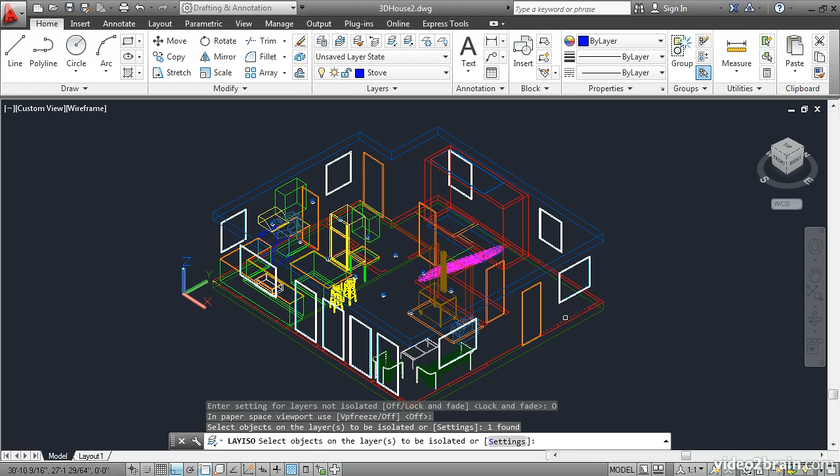In order to work on the walls of the house, let's go into the settings of this command and click Off. Press Enter and select one of the red lines representing the walls. Enter. Now we can work on this layer by itself. Click Top in the View cube to go to a plan view. Zoom in down here in this area.

Moving the cursor over the objects, I see that they are individual lines. This isn't going to work very well for a 3D model. Instead, let's create a new layer called 3D Walls. Make that layer current. Give it a different color, in this case, yellow.

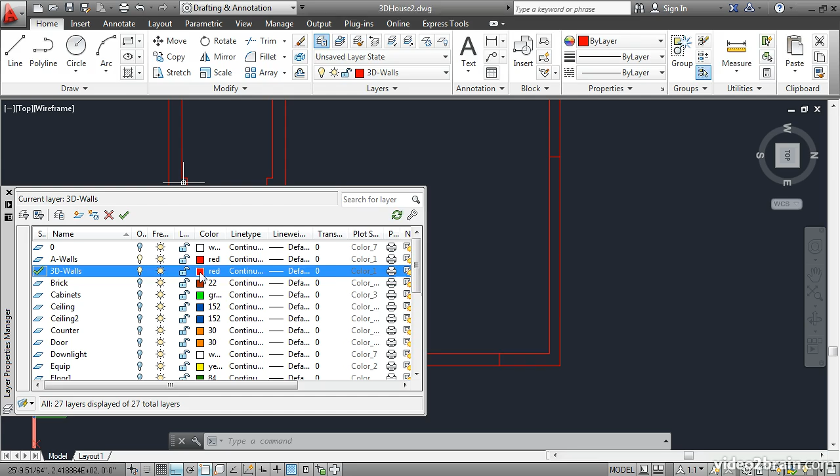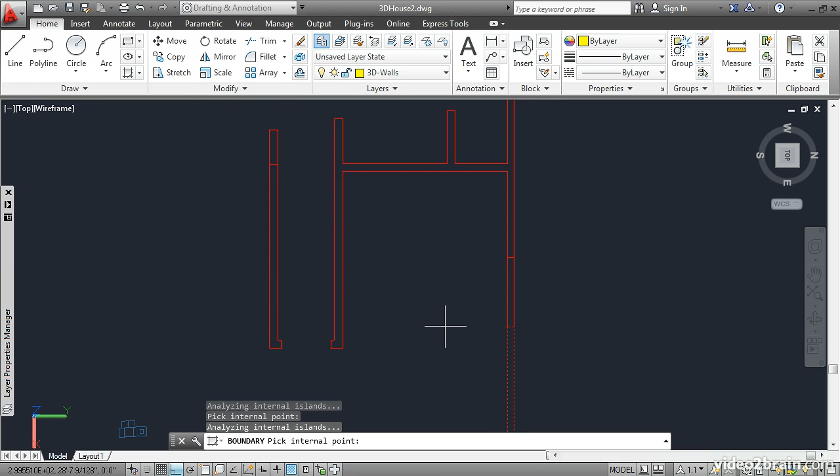Then go ahead and use the boundary command, which is located on the hatch flyout. The boundary command uses the hatch engine to generate closed polylines. Click here to pick points. You pick a point inside each closed area to generate a polyline. And the way that this command works is it analyzes the information on the screen.

I'll have to end the command, repeat the command by pressing Enter, and then just press Enter again to use this Pick Points option. Now I can click here. But if I try to get this, it won't work because it's not all on the screen right now. So I have to pan down and zoom out until I can see the entire boundary, and then use the command again to generate a closed polyline in that area. I'll keep going around the plan, generating closed polylines as I click in each bounded area.

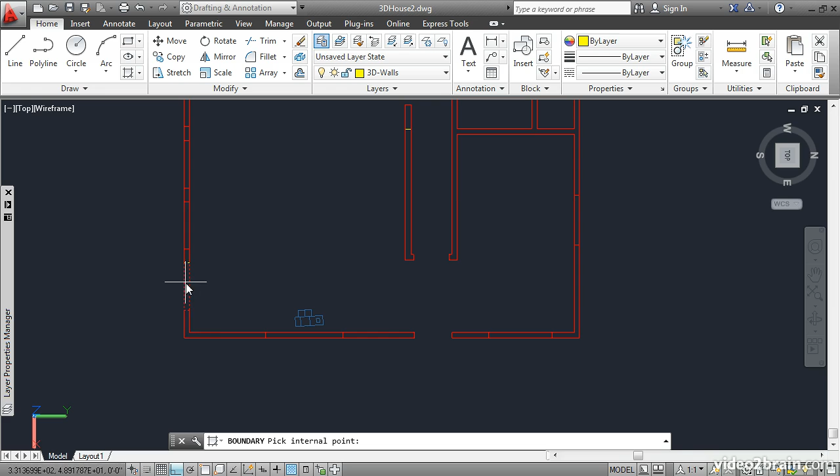Now I think I got every enclosed area, but I'm not sure. So let's go ahead and toggle off the A walls layer and see that we don't have any gaps. Yes, that looks good. Now I'll hold down Shift and drag the mouse wheel to Orbit.

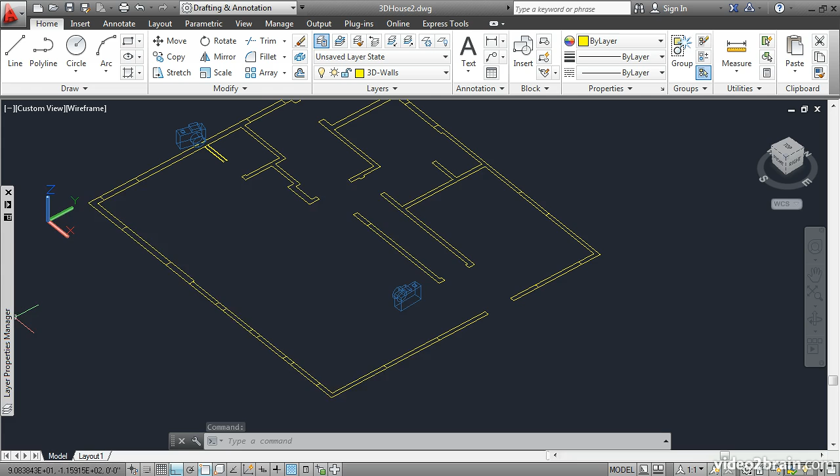And I'm going to go back to the Layer Properties Manager, scroll down, and turn on the Window Frame layer. This will give us information about which one of these pieces is a full height wall and which ones are sills. Let's switch to the 3D Basics workspace and then use the Extrude tool here on the Create panel.

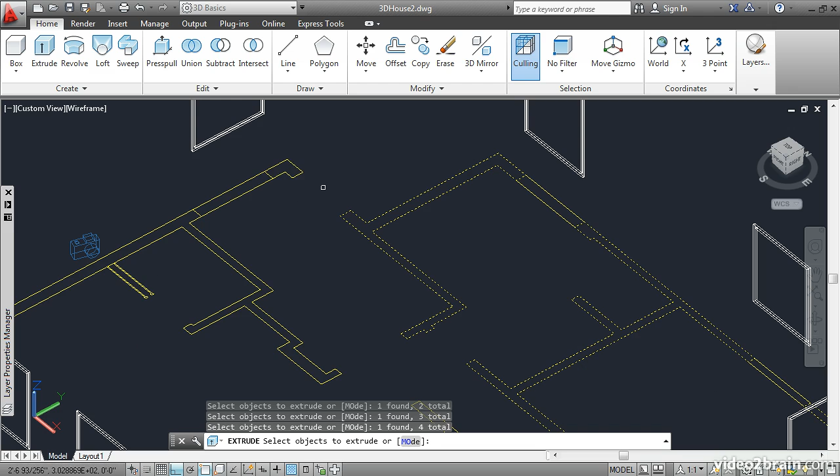Select each one of these closed polylines that represents a full height extrusion, that is, the pieces that aren't under the windows. Now it looks like this piece isn't in the right place with respect to the window. That's something that we'll fix later. Let's leave this piece alone. We won't extrude it yet. Press Enter, and then type 8 feet. That's 8 apostrophe, and press Enter.

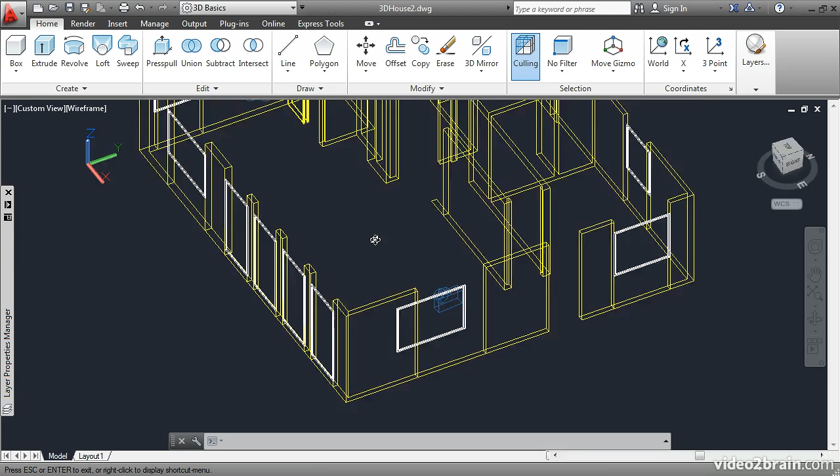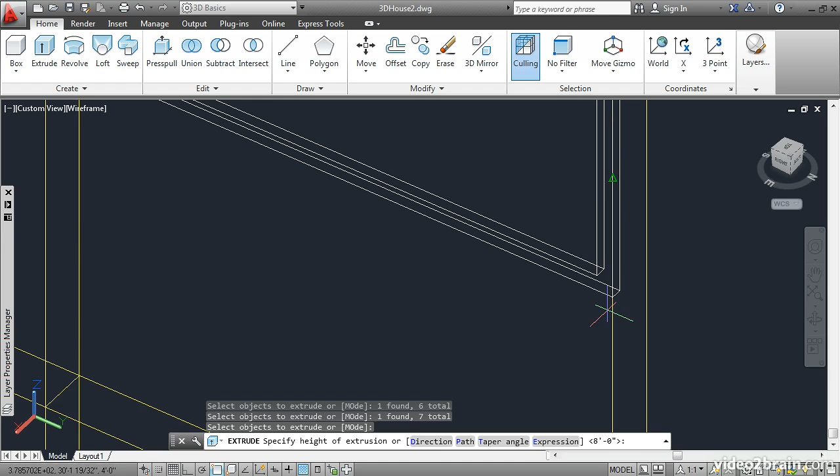Let's do this again, but this time we will extrude the pieces that are under the windows. They need to be extruded a different distance. Now these require a shorter distance, so I won't select them yet. I'll press Enter, zoom in here, and snap to the lower end point of one of the windows.

Next, we need headers above windows and door openings. So for that, let's draw them in using rectangles. Type REC, Enter, and then snap rectangles to the tops of each one of these openings. You can hold down Shift and drag the mouse wheel at any time to get a different perspective on the model.

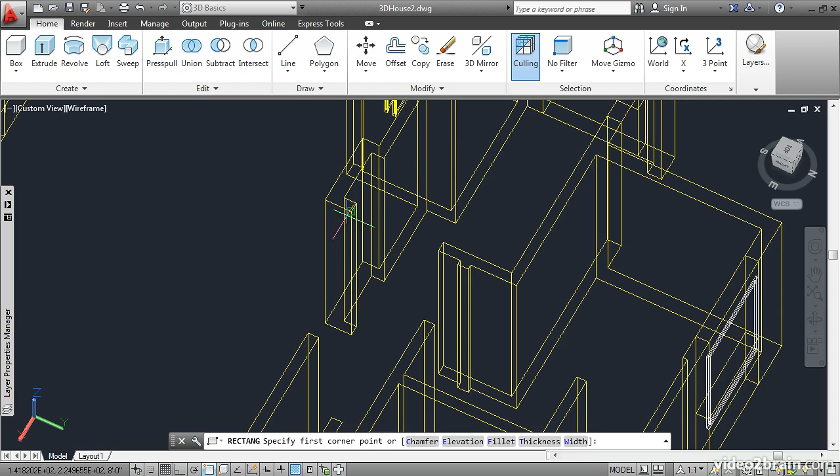This is necessary as you work your way around so that you don't have, like in this case, if I click here, I don't know where I'm going to snap. So I'm going to orbit so I can unambiguously see that endpoint. And then I'll click over there. Inside the space, there are a couple of headers that we need. Right here, and right here.

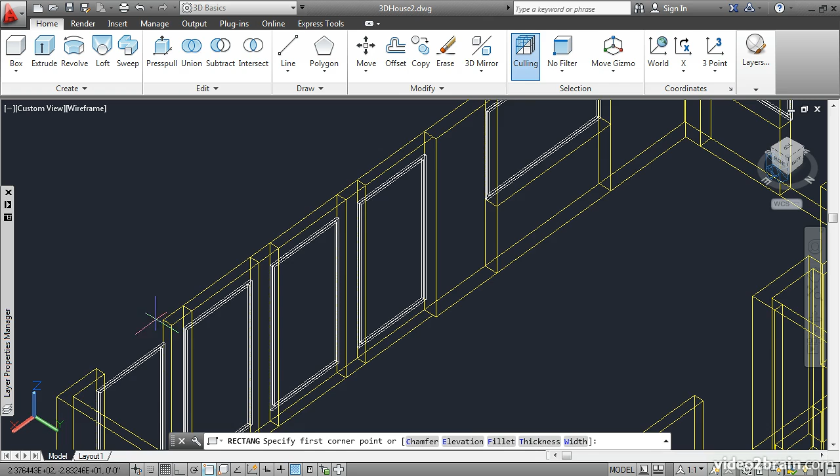I'll continue drawing in these rectangles, which of course are closed polylines, and that's going to make it easy to extrude them in a moment. Okay, extrude, and then I need to go back and select all of these headers. It looks like I missed one here. We'll have to make that in a moment. And then Enter, and I'll type in -12 to indicate -1 foot. Enter.

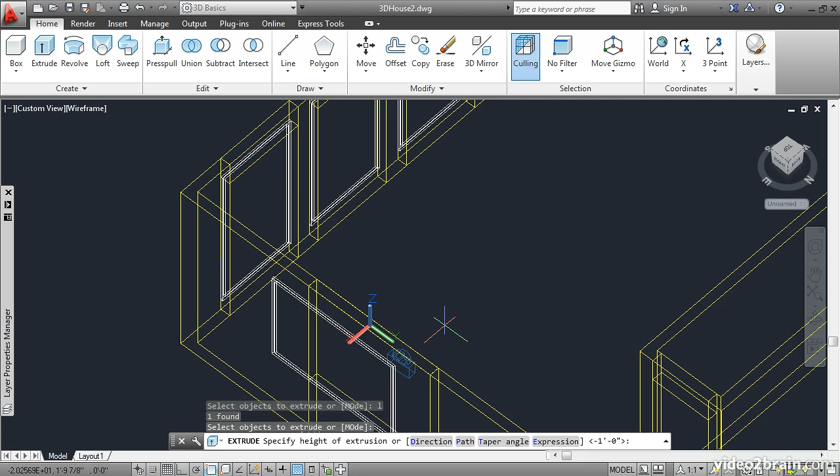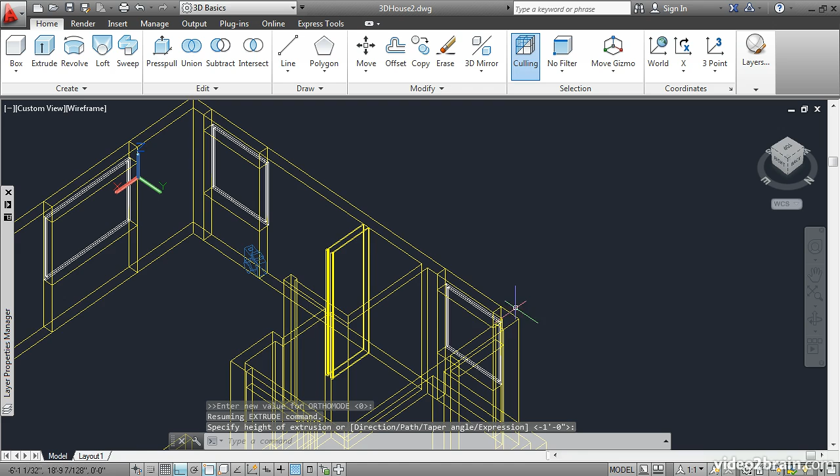Okay, over here I need to create another one. So REC, Enter for rectangle, draw it in, EXT for extrude, L for last, Enter, -12, Enter. Again over here, REC, Enter, extrude, this one, Enter, and I'll snap it to another one, like right here. So that indicates the distance in the Z direction.

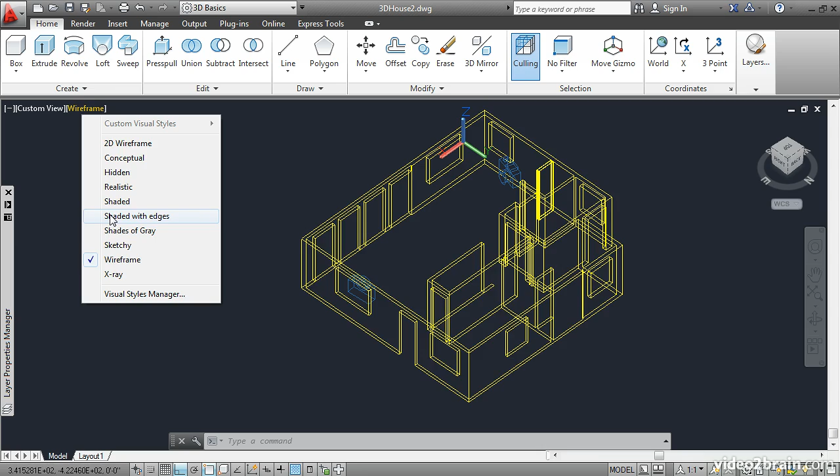Now let's go ahead and union all of those pieces together. Before we do that, let's turn off the window frame layer and then use the union command right here on the Edit panel. Select all of the pieces and press Enter. Let's go over here and open the Visual Styles Controls menu and choose Shaded with Edges. Orbit around. And we have a few other loose ends to take care of.

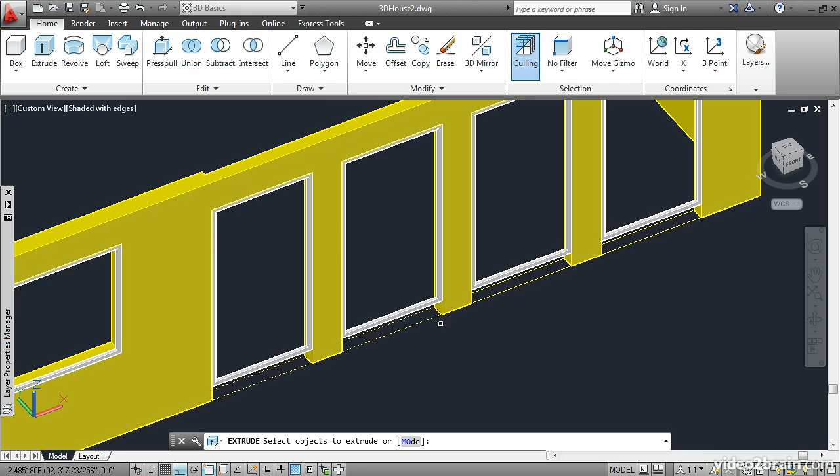Right here we have some more extrusions to make. Let's turn the window frame layer back on. And let's go ahead and extrude these 4 pieces. Enter, and then let's snap it right here. Again, union, select the wall and the 4 pieces, and press Enter.

Over here we have a special piece. Let's extrude that up 4 feet. Type in 4 feet, Enter. And then this is going to be cut back. So hold down the Control key and select this edge. The Control key allows you to select sub-objects.

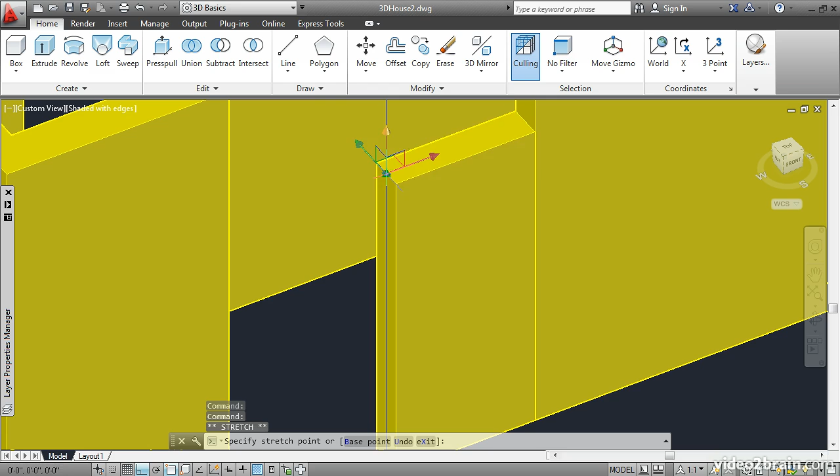Then position the mouse over the blue axis, click, and move it down. Type in 2 feet, Enter. And then press Escape to deselect the sub-object. Union, select these 2 pieces, and press Enter.

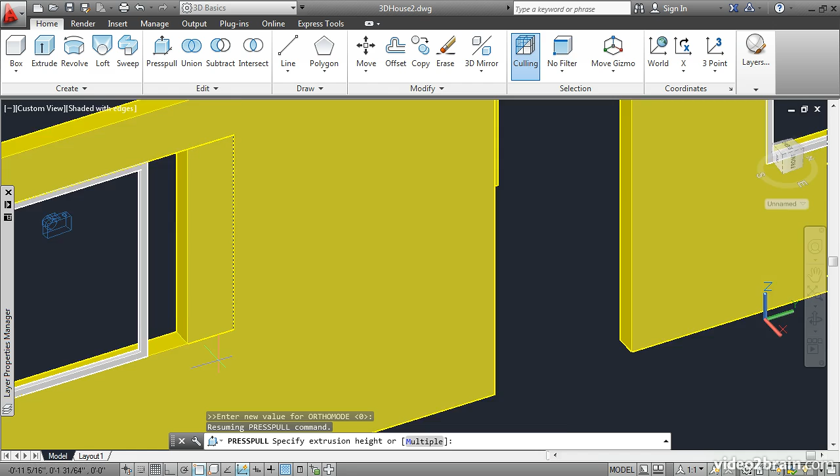Over here we have a mismatch between the location of the opening and the location of the window. That's no problem. Use the press-pull command right here on the Edit panel. Position the cursor over this surface and click. Orbit around to the other side and snap the press-pull to this endpoint.

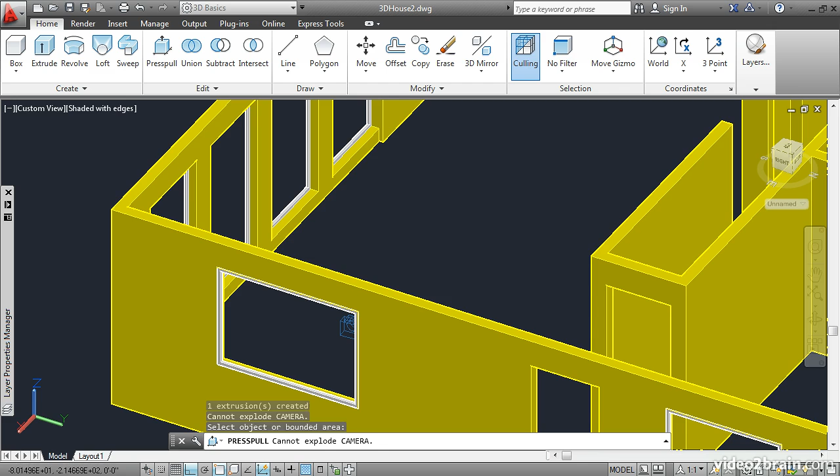Orbit around. Put the cursor right here so that this rectangle highlights. Click and snap it back to this endpoint, and then press Enter to end the press-pull command.

So in this lesson, you learned how to model the walls of a house using the boundary, extrude, union, and press-pull commands. You also learned how to manipulate sub-objects and change visual styles.